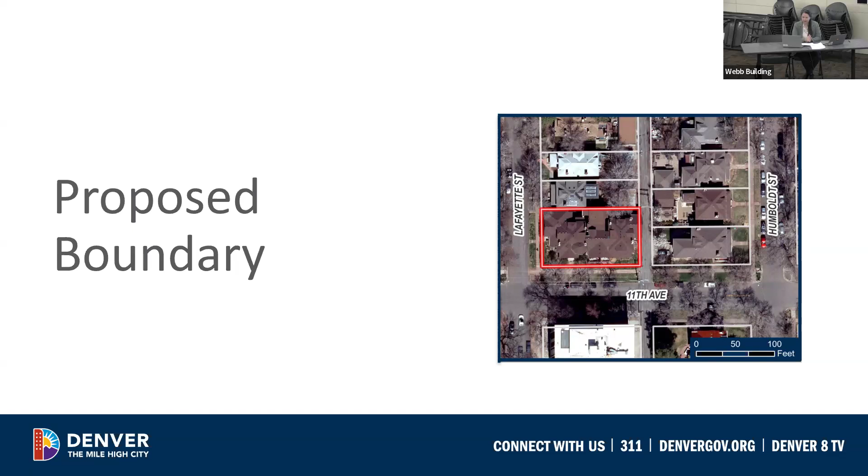Next slide. So I'm going to briefly go over the criteria for becoming a Denver landmark, as well as the landmark program and how we get to where we are. Next slide.

As many of you know, Denver's landmark ordinance was passed in 1967, making it one of the oldest landmark ordinances in the country, which we're very proud of. The purpose of this ordinance was to designate, preserve, and protect buildings in Denver, and to promote civic pride and good urban design. That is the overarching mission of the landmark program, and we try to honor that mission through what we are landmarking.

To date, we have 366 individual landmarks and 60 historic districts. Our historic districts are primarily residential in nature, though we do have 5 commercial districts. We also have 3 historic cultural districts—5 Points Cultural District, La Alma Lincoln Park, and La Raza Park—and 2 thematic discontiguous districts. Most of these districts and landmarks are clustered in the center of the city, including the one we're bringing to you today.

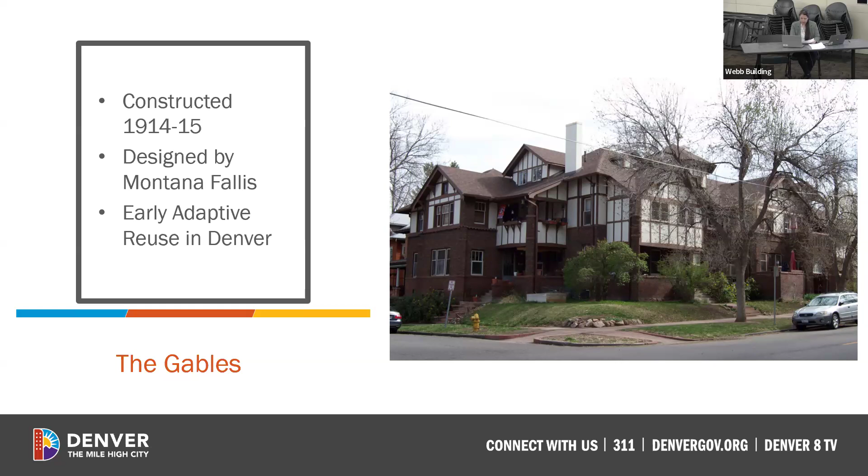First we'll talk about criterion C: does it embody the distinctive visual characteristics of an architectural style or type? This application argues that the Gables apartment is a good example of the Tudor revival style. Built between 1914 and 1915, the 3-story brick building embraces a style that was popular in Colorado in the 1910s and 20s. Distinguishing features exhibited in the property include masonry construction, half timbering with stucco infill on the upper levels, multiple prominent cross gables, a tower, and a prominent porch with a masonry arch.

Additionally, the building also has some craftsman elements, a style that emerged around the same time and a little later. These elements include overhanging eaves, exposed rafters, triangular knee braces, and porches with brick columns. Many of the windows have multiple panes over a sash with one large glass pane. So landmark staff does agree that this meets criterion C.

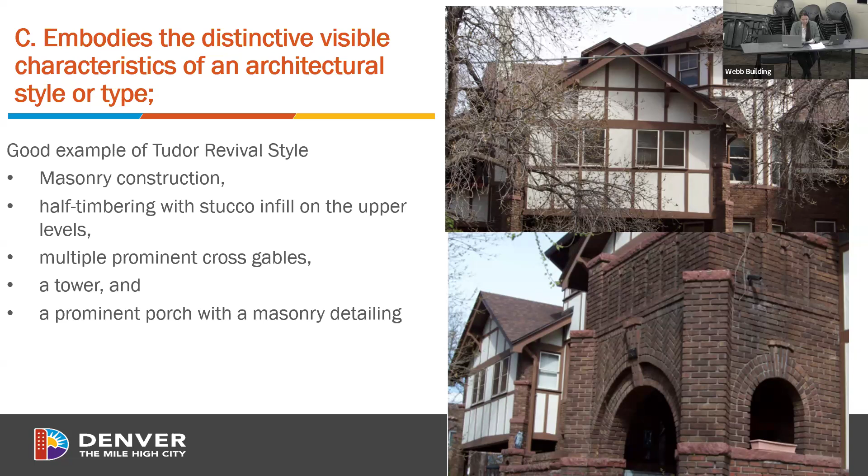Other examples include the annex of the Oxford Hotel, as well as the Art Deco Buerger Brothers building, one of my favorites in Denver. This is a very rare example of not only his residential style of architecture, but one working in the Tudor revival style.

Montana Fallis hired Adam Stein, a well-known Denver builder, to be his contractor—not without some controversy, as Stein was his father-in-law. But Stein was an important builder in his own right. He was one of the charter members of Denver's Master Builder Association, and permit records between 1889 and 1914 list him working on over 27 different buildings. So he did do a lot of work in Denver.

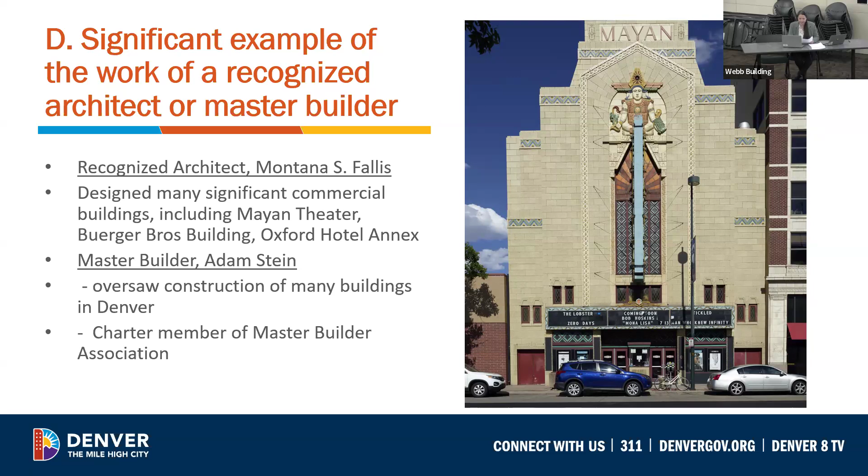Fallis decided, instead of demolishing the buildings and creating a new structure, he built upon what he already had. So this was a pretty uncommon design in Denver and makes this a very unique resource.

During this time in Capitol Hill, single-family homes were either subdivided on the inside to make multiple dwellings with few or no exterior changes to the building, or they were demolished to make way for new structures. Apartment construction at the time was usually pretty straightforward, as evidenced by extant apartment buildings from around 1905 to 1920—you think Poets Row, other areas like that.

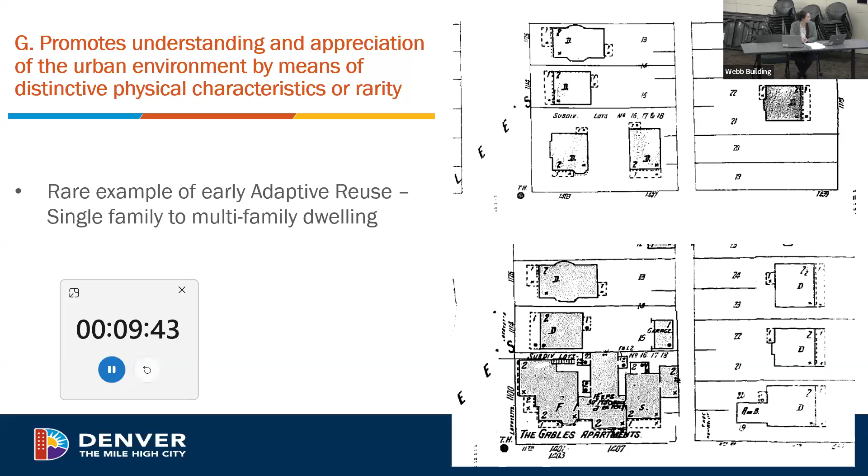Good afternoon. My name's Amy Anneberg Klein. I am the daughter of the current owner, Marilee Anneberg, who's here with me today. Our family originally purchased this building in 1949. So for 77 years, we've gotten to be the stewards of the legacy of this unique property in Denver. And we appreciate your consideration of helping us protect this property.

The Gables has always been part of my family. It seems I was a very young child when it first joined my family. My parents took extremely good care of things, kept things in character, and loved art forms and beauty all along. I am glad to have received this property from my mother as a legacy of her long-term care, and have been working to continue to take care of the property.

It tells so many stories. It's such a beautiful location in Denver. And I appreciate Denver looking at buildings and seeing history, telling stories, and helping us all keep track of where we've come from at the same time as we look at where we're going. I appreciate you looking at this property carefully and look forward to seeing it play a big role in the future of Denver, the Capitol Hill area, and the vicinity.

Thank you. Thank you. Christy, did you want to say anything?

Yeah. Hi, everyone. I'm Christy Miniello with Miniello Consulting. I also reside at 1340 Rosemary Street here in Denver. And as Becca mentioned, I prepared this application. First, I'm so glad that Historic Denver connected Marilee and Amy with me to help them with pursuing landmark designation for this unique property.

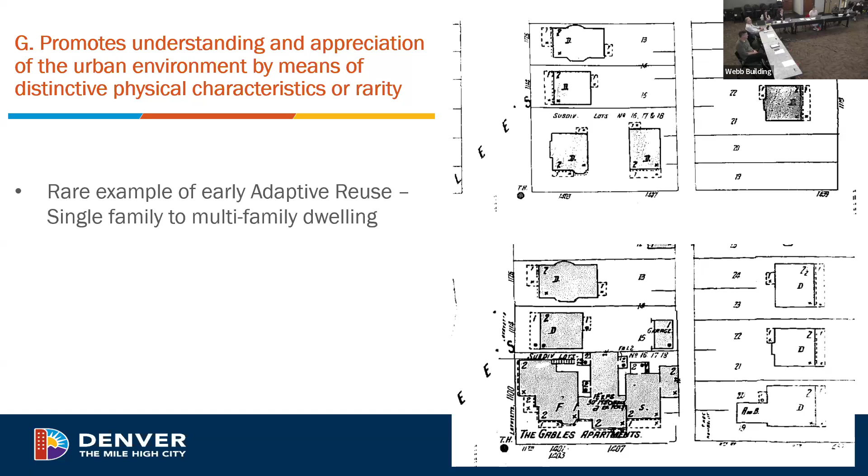Any clarifications or further comments from staff before we deliberate? I don't think so. Okay, and then we will open it up for public comment.

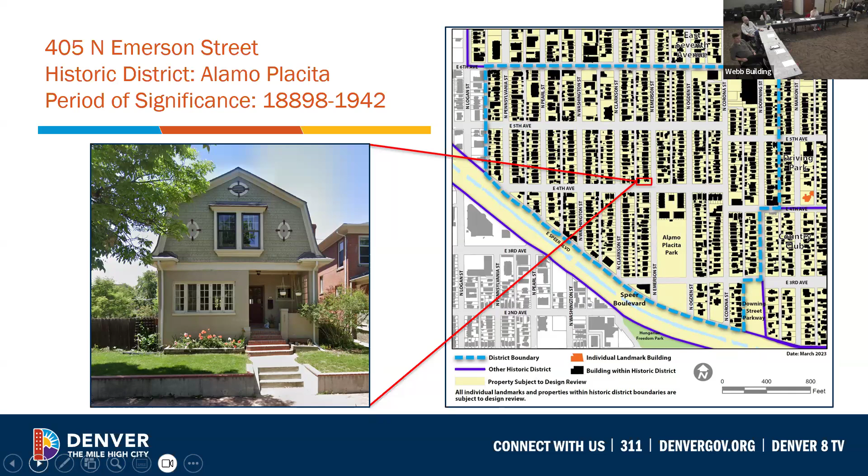In terms of this application, staff are concerned that the project scope and the potential impacts on the historic structure and the character defining features will significantly alter the character defining features of this Dutch colonial revival style home. However, we also are concerned about the application completeness and the accuracy of the presented demolition scope. So we are recommending denial of this application at this time, and we will spend the next few slides going through the project scope and the application completeness.

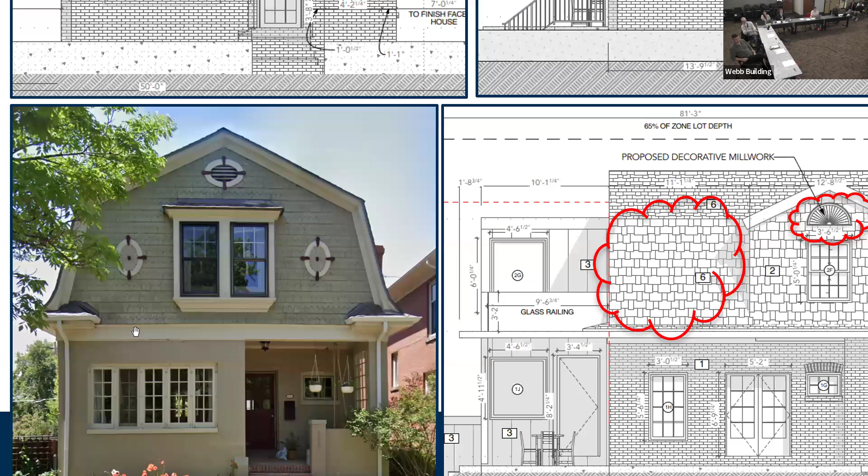We have not been provided historic evidence that indicates that this is not the original material, so without any further historic evidence, we must assume that this is the original cladding material, which does appear on all elevations of this home and in the dormers. Without any other evidence to the contrary, we are assuming this is the original cladding material and thus it should be preserved. Therefore, we are not supportive of removing this original cladding material and replacing it with the fish scale shingle that is shown in the application materials.

Additionally, this material is shown to be used on the side face of the Dutch gable, which would not be a traditional application of the roofing material—using cladding material on the side of the Dutch gable—which we have concerns over.

Additionally, the home does have more colonial revival style details, with bullseye detailing and vents that are proposed to be removed and replaced with decorative fan millwork details, which we are concerned about.

The design guidelines talk about preserving original stylistic features, which are examples of skilled craftwork, and without documentation of historic evidence that these are not original features, we must err on the side that these are original and should be preserved, not replaced with conjectural features. So we are recommending denial of removal of these original elements and encourage their preservation.

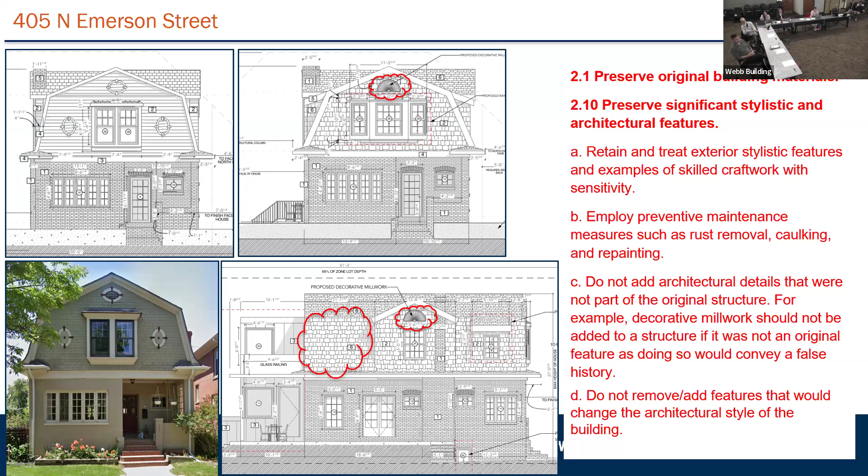The application materials are also proposing to significantly alter the front facade window. As you can see here, the front facade window is a two-bay window that slightly projects forward. The applicant does feel that the entire front of the home is an addition.

Staff does respectfully disagree with this assessment. We feel that this is an original Dutch colonial revival style home and that this should be preserved as a historic feature of the neighborhood and of this home, and that this historic design element should not be demolished.

Additionally, the design guidelines talk about not altering original openings on the front facade, and preserving the original position, number, and arrangement of historic windows, particularly on front facades. So we are not supportive of demolishing and widening the original window on the front facade to create a larger three-bay window as proposed.

On the side facade, which is visible from the side street, there are several alterations proposed to window and door openings. The guidelines do talk about alterations being considered on facades not visible from the street. Staff are concerned about the number of alterations proposed on this home.

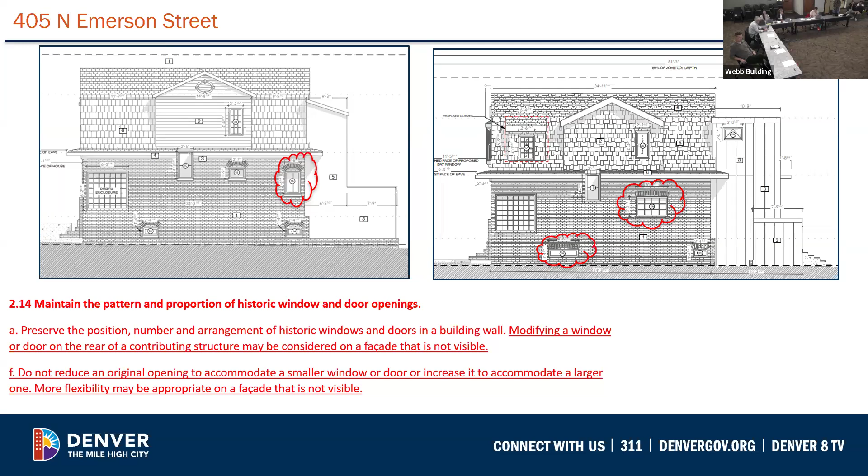There are not good photographs of the door in the application, but it does appear to be an original door, and staff are concerned about replacement of this door, as our guidelines encourage preservation of original doors, and if original doors do need to be replaced, that they are replaced to match original conditions.

A full light divided light door for the front is not typical of the style of this home, and is not something we would be supportive of. So this is something we are also recommending denial of and have concerns over. So did want to point that out to the commission as well.

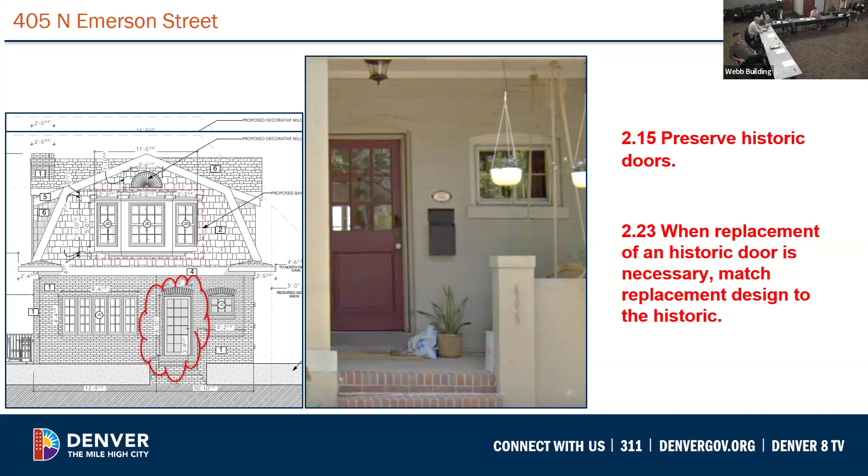In terms of the window application request, there does appear to be a few existing historic windows intact on this home, and those are proposed to be retained and preserved. They are not keyed to any elevations within the application materials. However, we are supportive of preservation of these windows, and our guidelines do encourage preservation of original windows, so we are supportive of that project scope.

In terms of the other windows, there are several non-historic, non-original vinyl windows, and those windows can be replaced, and we are supportive of the replacement of these vinyl windows as well. However, they are also not keyed to the elevation, so we are unclear as to where exactly these vinyl windows are located on the home.

And additionally, when we talk about replacement windows, we need to know that the replacement windows will match the existing opening sizes, and it is unclear to us if the proposed replacement windows will match the existing opening sizes, as when we looked through the elevation, some of the windows do appear to be different sizes than the existing and the proposed and existing elevation.

So we're very concerned that the proposed windows will not match the existing opening sizes, as our guidelines do talk about not using perimeter infill framing, not creating smaller or larger openings. And we are just concerned that this will really change the existing historic character of the home.

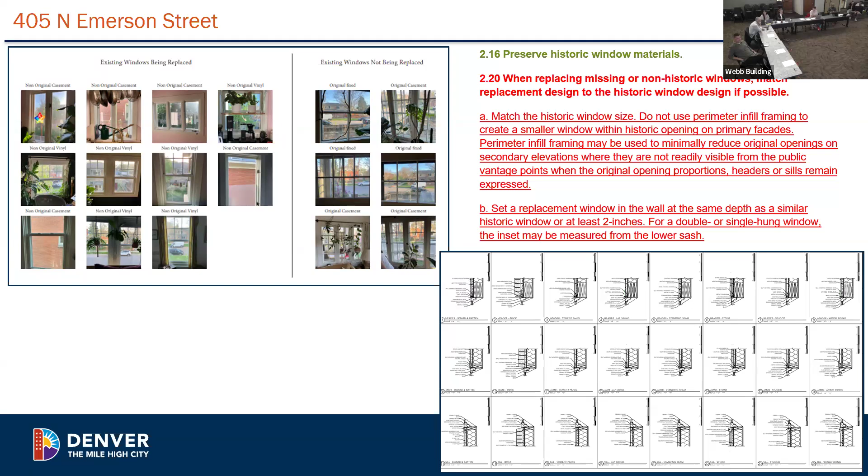And additionally, there are some window sections through stone, which there is no stone on this home, and there's no stone proposed in this application, so we do need some additional clarifications on the window inset, and we need it to relate to this particular home and not to be a generic window inset, as we need to ensure that the window inset is matching the historic window inset and maintaining that historic profile.

This proposed application is also proposing to add dormers to the front of the home. These 2 dormers are proposed to be shed dormers. The shed dormers are only showing demolition on the roof, and it is showing 11.32 square feet of demolition on the roof. And they will be fairly visible, because again, this is the corner property.

When staff discussed the dormers, we did feel that we could potentially be supportive of the dormer on the side interior lot, but we were not supportive of the dormer on the side street due to its visibility on the side street. Our guidelines do talk about minimizing the visual impact and setting side dormers back from the front facade.

Staff feels like these 2 dormers will significantly alter this Dutch gambrel roof profile and significantly change the profile of the roof. Again, the applicant feels like the front of the home is an addition to this home and is not historic fabric, and is thus proposing these 2 dormers in this location.

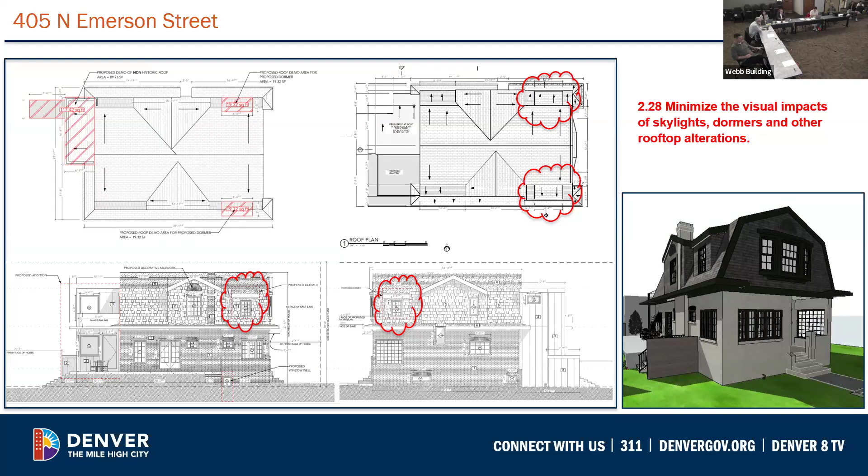Our guidelines do talk about not demolishing contributing buildings to historic districts and or historic buildings with individual landmark designation. So again, this isn't an individual landmark building, but is a contributing building to the Alamo Placita Historic District. And anytime you're demolishing more than 40% of a contributing building, it does trigger a public hearing before the Landmark Preservation Commission. A public hearing is triggered at 40% of the exterior wall surface, 40% of the roof structure, or combined square footage of the roof structure and wall structure.

So staff is concerned that the demolition calculations are not accurately depicted in the application for this project. So I have indicated here on the screen rough approximations from staff where additional demolition will occur to accommodate changes in window and door sizes that have not been included in the demolition calculations.

In the top left of the screen, there will be additional changes to the rear facade: converting an existing second floor window into a large door to allow access onto a balcony from the new proposed addition. On the ground floor rear elevation, an existing window will be converted into a double window with more square proportions. On the street fronting side elevation, an existing door will be converted into a double door, and a new window will be added to this elevation.

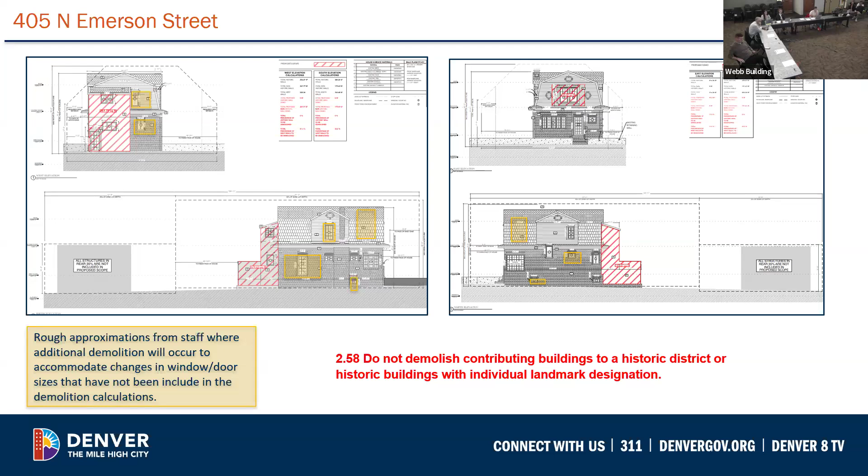These are additional areas that have not been included in the demolition calculations, and we need these included as part of the demolition calculations before we feel comfortable fully assessing how much demolition is occurring to this home. Finally, this application does include a rear addition.

As stated previously, the existing addition was constructed in 2012, so it is non-historic and can be demolished. The proposed addition is located at the rear of the home and is subordinate to the historic structure. It can be recognized as current construction and will be clad in vertical beadboard siding, with casement style windows that generally have header and sill heights aligning with the proposed and existing windows.

As stated previously, all windows do need to be inset in the wall plane, and again the windows appear not to be inset into the wall plane based on the window sections that were provided. So that will be needed for us to feel comfortable with this addition.

The existing addition and the proposed addition both have a flat roof. This home originally did have a rear porch, so we feel that this flat roof is indicative of that rear porch design and character, and we feel comfortable with that flat roof design.

The overall addition height, form, and massing is subordinate to the primary structure. It is set back from the side street, and the addition is compatible with the surrounding historic context. So we are supportive of the rear addition.

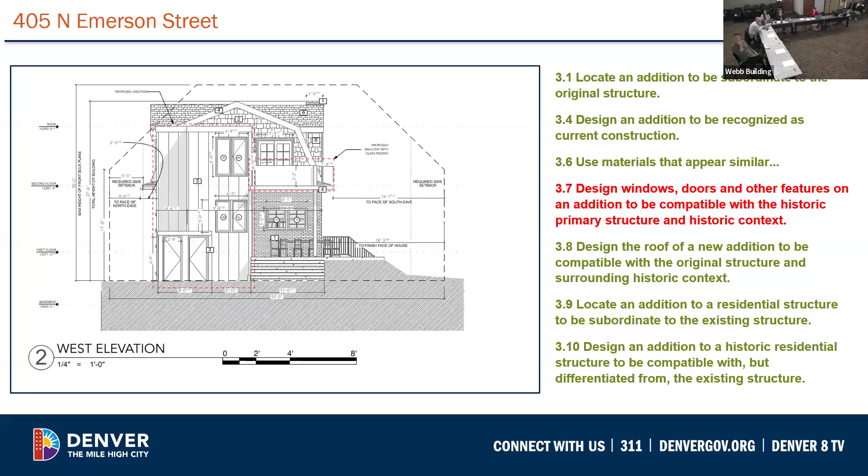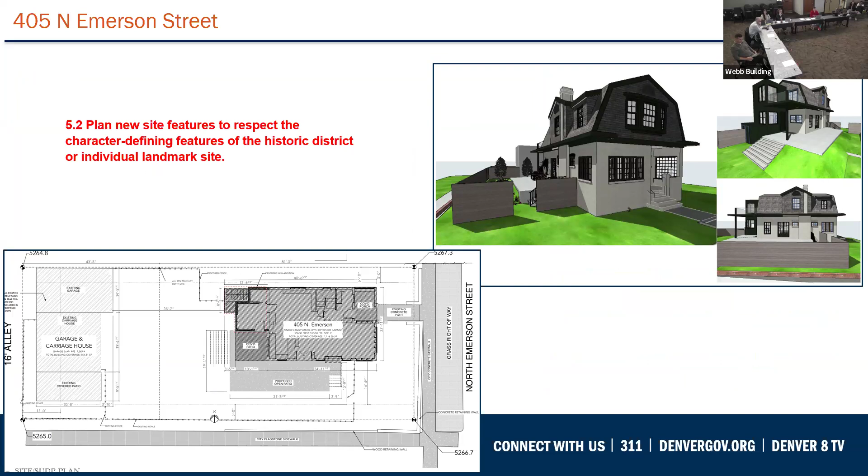Finally, this is minor, but we do need some details on what is proposed for the site work. It does look like there is going to be some new horizontal fencing and new patio work proposed. So that is another reason we are recommending denial of this application, as there are some incomplete details on the proposed site work as well.

So at this time, we are recommending denial of this application, as we are very concerned about the proposed alterations to the historic structure and the completeness of the application.

Thank you, Brittany. Commissioners, do you have any questions for staff?

I do, yes. I am curious—you said it yourself about the completeness of this submission, and it does seem there is a lot more coordination that needs to happen. So I'm curious what the conversation has been with Landmark and the applicant in terms of proceeding with bringing this project to this meeting for our review.

The applicant let staff know that they wish to proceed with this meeting.

What's the process for... so there's a disagreement as to whether or not the front is the addition, or whether the front of the house is an addition or not. There is a disagreement, yes.

How would that evidence possibly be presented? I think the applicant is going to present their case to you as the commission, and you can discuss with the applicant and make that determination.

Elizabeth or Rusty, do you have any questions at this time?

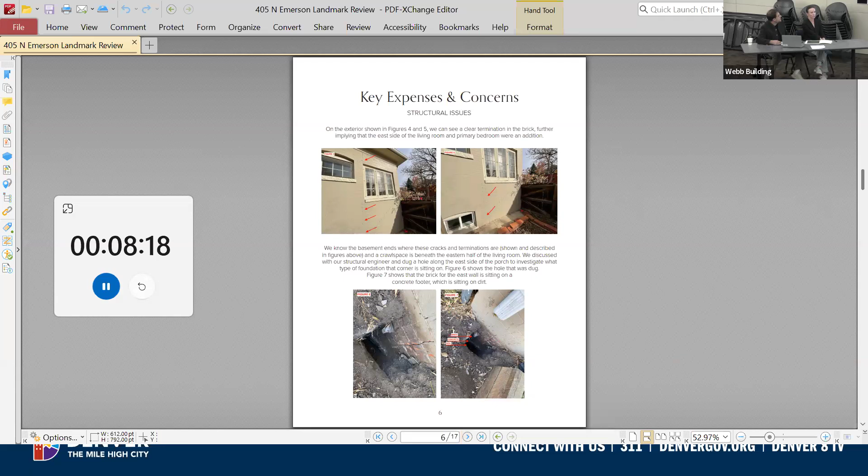Here's some more evidence of that foundation height, how little wall is actually underground, and then when the whole home is sitting on a full height basement, that front area has a small access port to this crawl space, which shows modern concrete being poured inside, as well as modern framing on the floor joists and insulation, indicating that this is not the original home. The bricks also don't match.

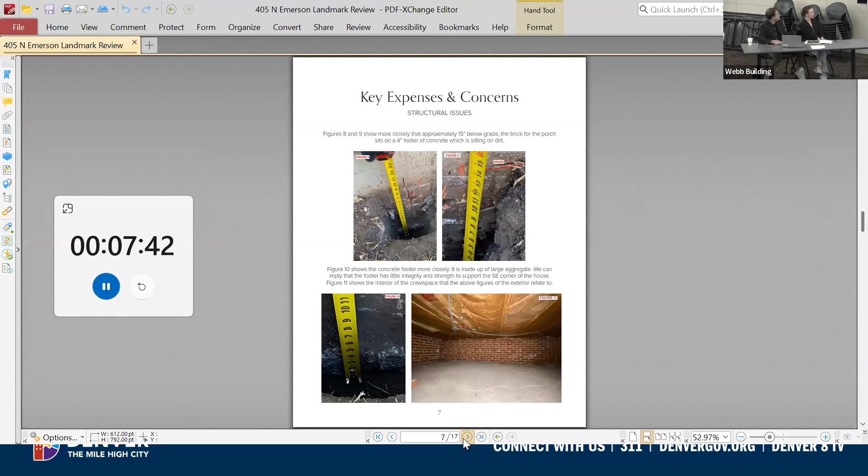So this is kind of a report we put together showing what helical piers will need to be put into the ground to support that with a new foundation, to prevent further sinking of that front facade of the house.

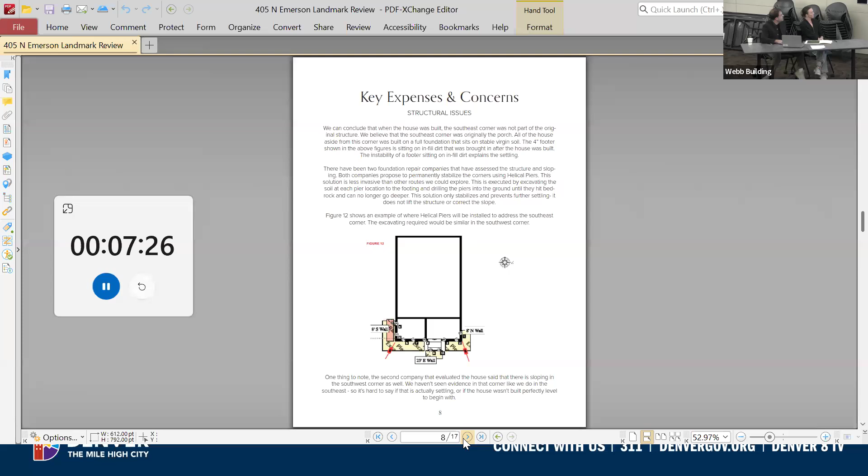Our proposed plan was to split that large front bedroom into two bedrooms, in which we were trying to achieve 2 egress windows. And that's why we're here today, not seeking approval, but to get some guidance and help from you on how to best do this, where we have submitted both dormers as well as changes to the front window facade. We're really only seeking one of those 2 solutions, and that is all for getting egress windows into those bedrooms.

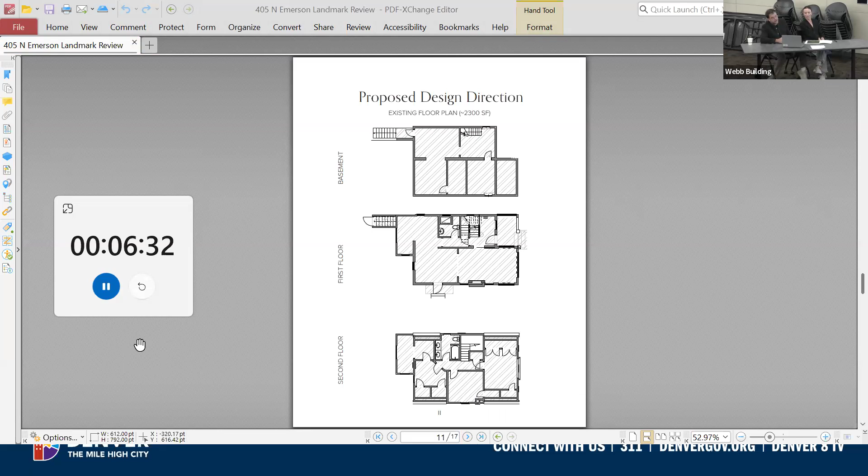We're not sure which is more likely to get approved, so we submitted both, hoping that we could find out the preference of the board and work from there, which also speaks to the completeness of our application. We have not done any of the construction coordination or drawings past this point, in the event that we do end up needing to change significant amounts to our proposed floor plan if we are unable to proceed further with putting windows on the front facade or south facade of this home.

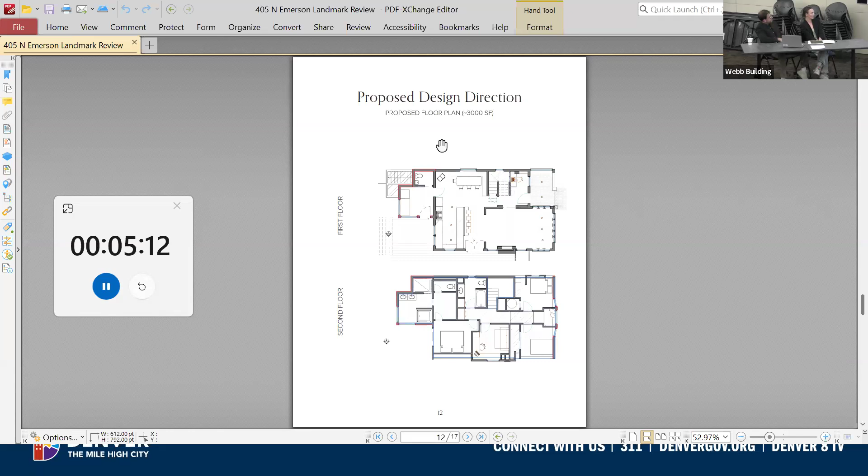Our goal today is, while we have full intentions to satisfy landmarks requirements on the detail level and the granular level of our documents, including the facade materials, doors, things like that, our biggest goal today, to reiterate, is to find out what is the best path, because we received a vague answer on whether or not we can increase or add the dormer on the south side, or increase the window opening on the front facade on the second floor.

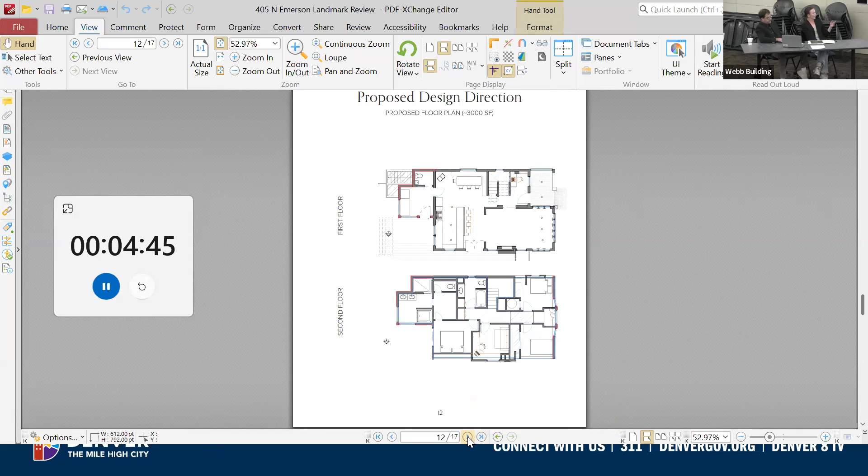So, back to what Harrison said, we're just seeking guidance because I think you had asked what is the process when there's disagreement on an existing structure, and it's the front window that is under contention right now, or in question right now. It is our belief that this front part of the second floor was added sometime after the porch was enclosed, and those are the windows that are currently vinyl.

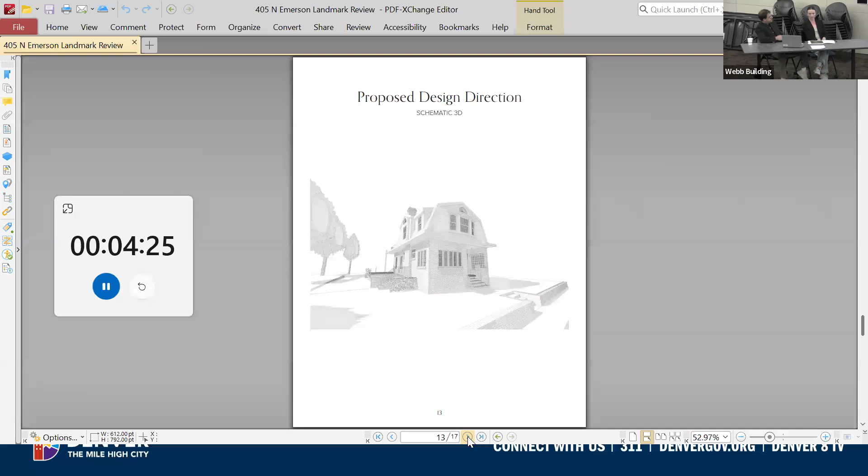So we're just seeking some guidance. In a perfect world, we'd love approval to increase that window size on the front facade, which would help us get egress windows to meet our clients' modern family needs before they dump a lot of investment into it structurally.

So, are there any questions? Commissioners, do you have any questions for them? Do you have a structural engineer look at this, or is this just your own evaluation? We did have our structural engineer evaluate it. He came to the same conclusion, that none of the floor joists were tying through to the front rooms.

I am curious, we see this a lot with some projects. Were the current homeowners aware that they were buying a property in a historic district that's also a contributing property? You can ask them, they're sitting right there.

We did not know the depth of the requirements to improve a home like this, but we were aware that we're in a historic district and we had to honor that. That's kind of why we're going about this process the way we are, to seek guidance and figure out how to make it work. Sometimes it comes up with other homeowners, that's why I was asking.

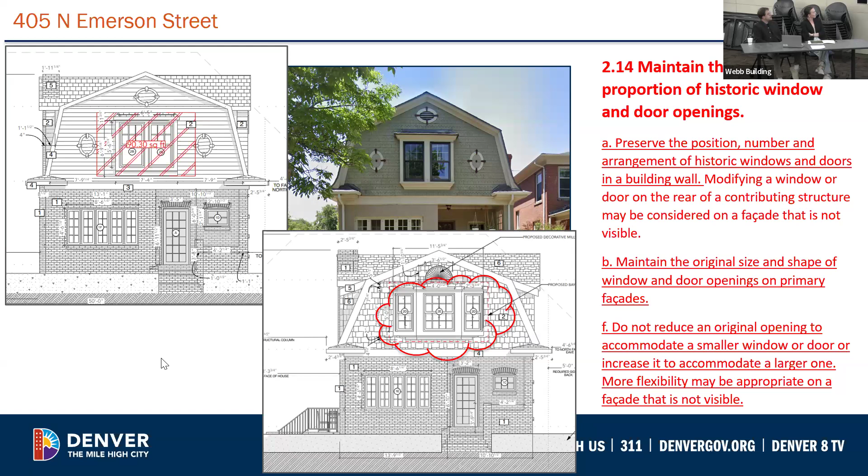Okay, any further questions for the applicants? So to understand the front addition, in your investigations, are you saying that everything from the front door forward was not original? Correct. So if we have a side elevation, can we go to that? Yes, I can definitely go to a side elevation. Sorry, too far.

And the bricks were just butt jointed? Yeah, joined together and they're all separating. So there's probably been 4 or so inches of settling, and the cracks are continuing to enlarge.

The bedroom that currently sits in what we are suggesting is an addition on the second floor is currently sloping about 2 plus inches toward the southeast corner. And there's an evident difference in flooring and joists from basically where the threshold on that elevation would be into the interior bedroom, if that makes sense.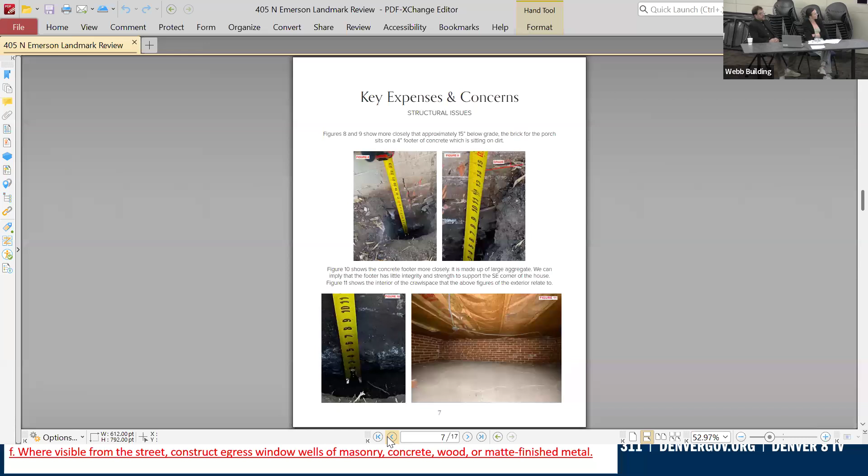And evidence of cracking in the siding above? Well, the roof is new, so there's no evidence of cracking on the siding above. And then, the existing brick you'll be cleaning off, is there stucco on there right now? No, it's painted brick.

Okay, so... I think we have reached the end of our questions for you, so thank you for that.

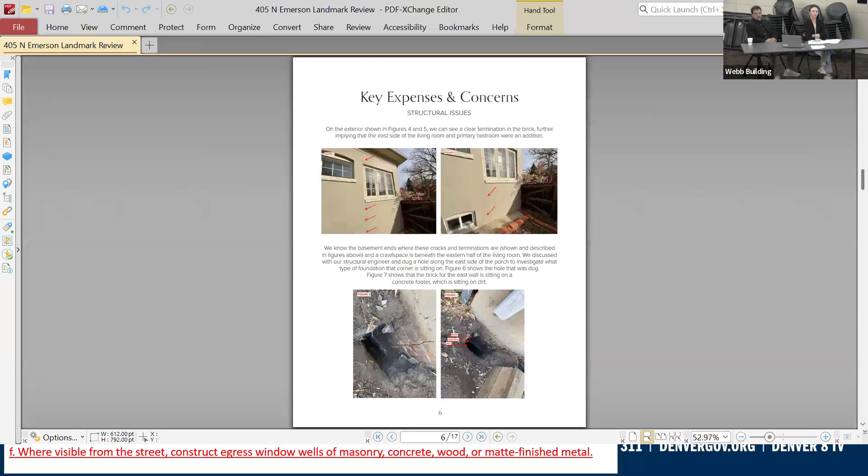Before we move into deliberation, any further clarifications from staff? I do not have any further clarifications other than I am more than happy to work with you, and I just want to make that clear. I am here to help you, that is my job. I'm not here to deny you. I want to work with you on this application, and if you felt like I was being adversarial, I apologize, that's not what I'm here to do. My goal is always to help people.

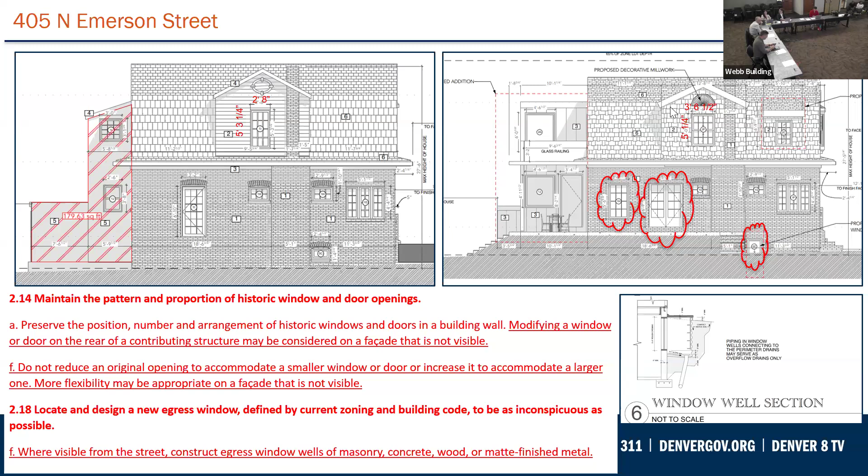I appreciate that. All right, thank you very much. You can go back to your seats and we will move into deliberation. Great, what are commissioners' thoughts?

Yeah, and for the benefit of the whole group, what I whispered to Chris as a sidebar is, as I look at the photos from Google Earth at that condition, at the filled-in porch, to me it speaks to a filled-in porch, not a front addition. And the slope of the porch, or the interior room now, was sloped to drain because it was exposed to the elements. So I would say to staff, as you see that evidence, keep all that in mind.